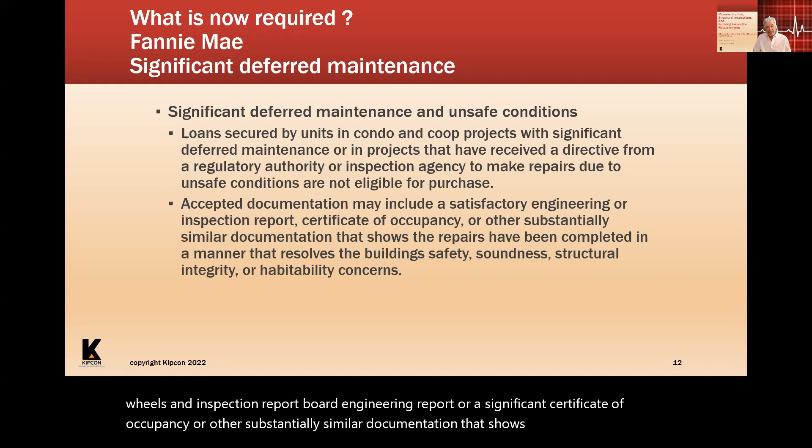Accepted documentation may include a satisfactory engineering or inspection report. To me, it's really not clear what the difference is between the person who does an inspection report versus an engineering report, or a certificate of occupancy, or other substantially similar documentation showing the repairs have been completed in a manner that resolves the building's safety, soundness, and structural integrity.

Now, I'm going to jump around a little, but you'll see that if there's a special assessment, even if you've had one to fix things, they will not approve a loan or make it eligible for purchase unless the special assessment work is completed. You can't do it if you just have a special assessment.

These policies do not apply to routine maintenance or repairs that a homeowner association undertakes to maintain or preserve the integrity and condition of the property.

Now, when I look at this, as you know, a lot of us live and breathe community associations. Keep in mind, this is for condos. There's a mix-up in terminology here because a lot of people interpret homeowners associations as something different from a condo, but this is based on condos and co-ops, so don't be confused by the wording.

The policy doesn't apply if the damage or deferred maintenance is isolated to one or a few units — I don't know exactly what 'a few units' means — and does not affect the overall safety, soundness, structural integrity, or habitability of the improvements.

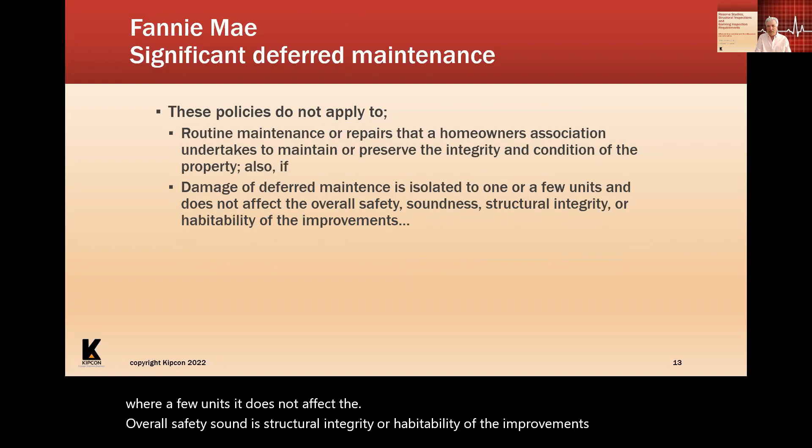So there are some things the policies do not relate to. Now let's talk about Fannie special assessments.

Any current or planned special assessment, even if paid in full for the subject unit, must be reviewed to determine its acceptability. What does that mean? If the special assessment is related to safety, soundness, structural integrity, or habitability, all related repairs must be fully completed or the project is not eligible. So there's a number of things going on here, and certain requirements apply.

Now, what did they say about reserves? It used to be that you needed to set aside in your reserve fund 10% of your annual budget, or have a reserve study done in the prior 24 to 36 months — I think it's 36 months for Freddie and 24 months for Fannie. But they've changed that, and now they don't allow a reserve study to justify less than 10% of the budget.

And they require that the community have a reserve study in lieu of, which is 10% of the budget. So if you've heard my seminars on reserves, it's 10% of the budget — not to give my opinion on this, but 10% of the budget may not necessarily be reflective of the community, but it's the guideline they're using, and that's what it has to be.

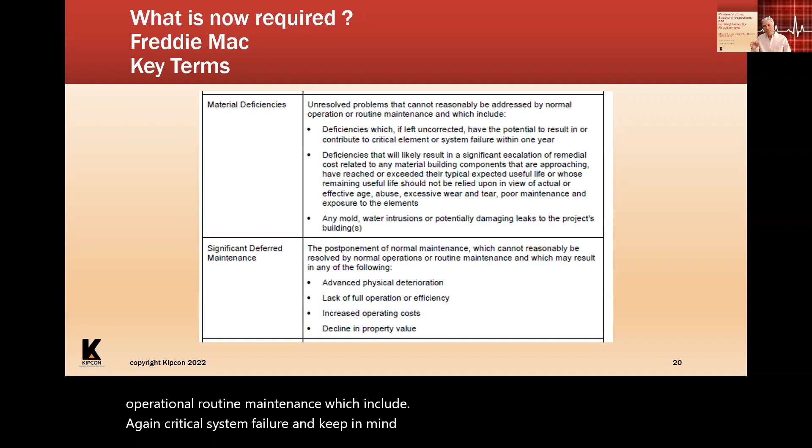Material deficiency means unresolved problems that cannot reasonably be addressed by normal operational routine maintenance, which include critical system failure. Keep in mind, which I'll get to in a few minutes, that in some cases we're not just talking about the structure - we may be talking about, for example, a fire protection sprinkler system, where if there's a fire and it doesn't work, it's a danger. So it's not just a matter of buildings collapsing.

So material deficiencies include deficiencies that will likely result in significant escalation of remedial costs related to material building components - I'll touch on that in the future - but also any mold. Now, they really draw the line and say significant deferred maintenance - what does that mean? The postponement of normal maintenance which cannot reasonably be resolved by normal operations or routine maintenance.

And which may result in any of the following. Now, there's some confusion in terms being used here regarding deferred maintenance and routine maintenance. I'm going to touch upon that in the future regarding what the industry and the standards say about the definitions of the different types of maintenance, but which may result in any of the following: advanced physical deterioration, lack of full operation, increased operating costs, or decline in property value. So these are the kind of definitions we're dealing with when it comes to these standards.

So now, what are routine repairs and maintenance? Often preventive, let me see, my pointer is not going where I want it to go. Okay, here we go. Routine repairs, often preventive, accomplished within the project's normal operating budget, typically completed by on-staff site staff, focused on keeping the project fully functional.

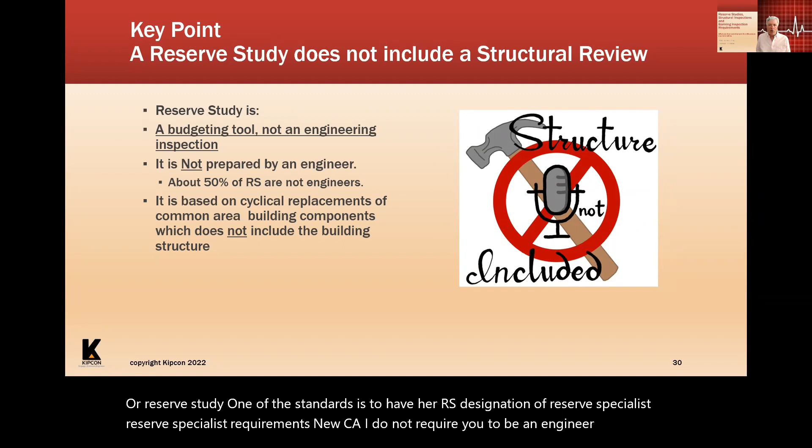To prepare a reserve study, one of the standards is to have an RS designation, a reserve specialist. Reserve specialist requirements through CAI do not require you to be an engineer, and less than 50% of those who have their RS are engineers. So please don't be fooled into thinking that if you do a reserve study and keep it up to date and adequately funded, it will protect the structure of your building. It doesn't. The reserve study is based on cyclical replacement of common area building components like roofs, roads, sidewalks, and those kinds of things. It does not look at the structure.

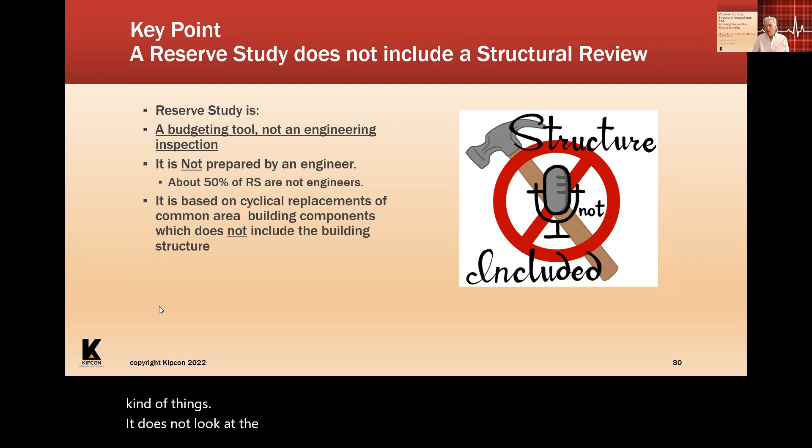The next thing we concluded pretty quickly is that this is not a high-rise problem. The building that collapsed was a high-rise, no question, but public policies should be based on the type of structure, not the height of the building. So these public policies are based on multi-family residential buildings of concrete, load-bearing masonry, steel, or hybrid structural systems, such as heavy timber, including podium decks, which I'll touch on. It's not just high-rises, it's based on the materials.

For all the managers out there, I'm sure you've seen buildings that are not high-rises that are starting to exhibit structural problems.

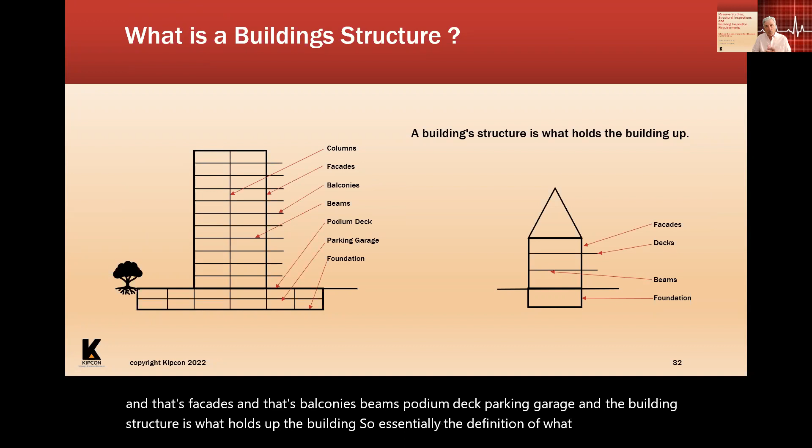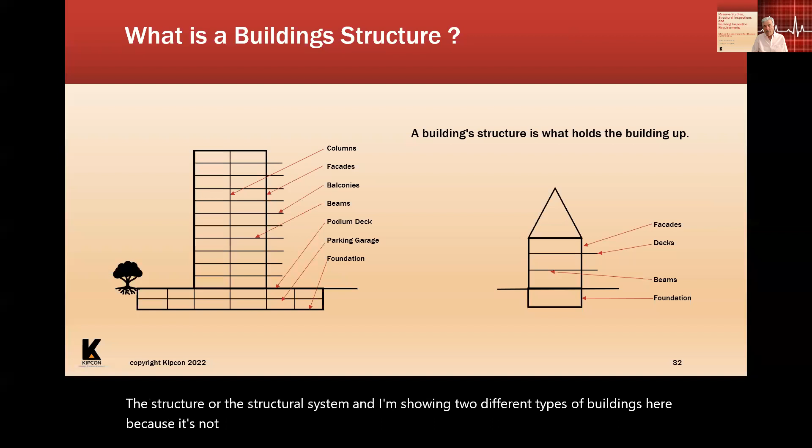So what is a building structure? A building structure is made up of certain parts: columns, facades, balconies, beams, podium deck, parking garage. The building structure is what holds up the building. So essentially, the definition of what you're looking at when you do a structural inspection is the parts of the building that hold it up, the structure or structural system. I'm showing two different types of buildings here because it's not only a high-rise; this may be a townhouse building on the right-hand side.

So what is the structure designed for? I'll go through this quickly, though I like to talk about it since I'm an engineer. The structure is designed for the weight of the building, the live load in the building—for example, us people in the building are the live load—the snow on the roof, and the wind blowing against it. So it's designed based on the building code for all these different things.

What is the structural system of the building? The structural system takes those loads—dead, live, snow, and wind—and takes them from hitting or being inside the building, bringing them down to the ground at the foundation. To use a technical term, it's the interconnected parts of the building, the beams and columns, interconnected to form a path by which the external and interior forces—dead load, live load, snow load, wind, seismic—are applied to the building and delivered to the ground. That's what the structural system is.

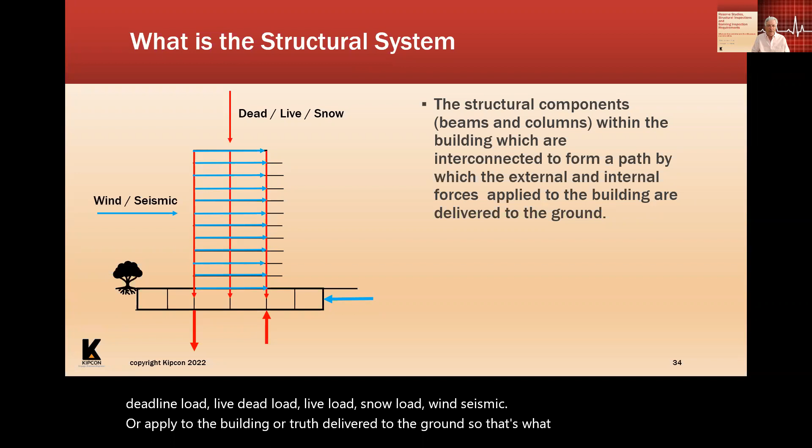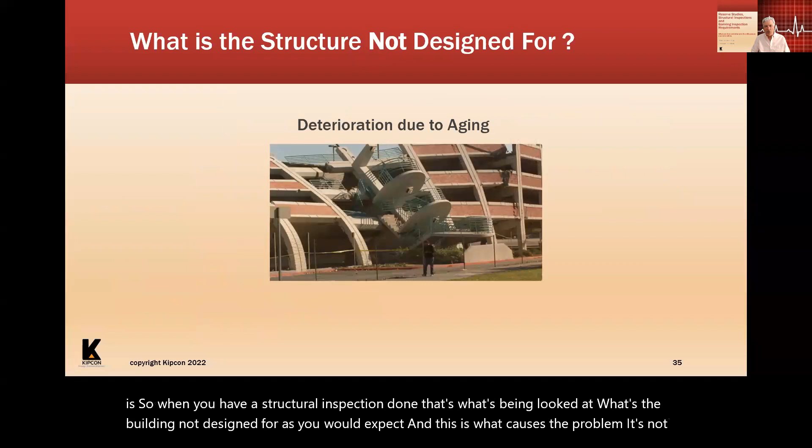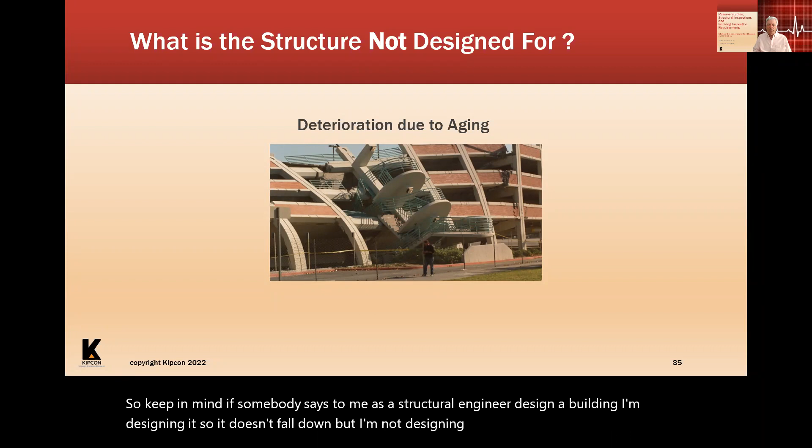So when you have a structural inspection done, that's what's being looked at. What's a building not designed for? As you would expect, this is what causes the problem - it's not designed for deterioration due to aging. If somebody says to me as a structural engineer, design a building, I'm designing it so it doesn't fall down, but I'm not designing it to keep it from aging, because everything ages.

There are certain structural materials, as I mentioned, that are used for the building, and I'm not going to go into that again. But what is the main cause of deterioration? Anybody want to guess? If you were here live audience, you'd all know it - the main cause of deterioration is moisture.

It's the age of the building, of course, but when you have moisture touching pretty much any type of structural system, it reduces the age. You can see I got wrinkles on my face because I stand out in the rain, my hair is turning gray because I stand in the rain. It takes the color out of it. But age and moisture - moisture is the primary thing that affects the structural capacity of the building.

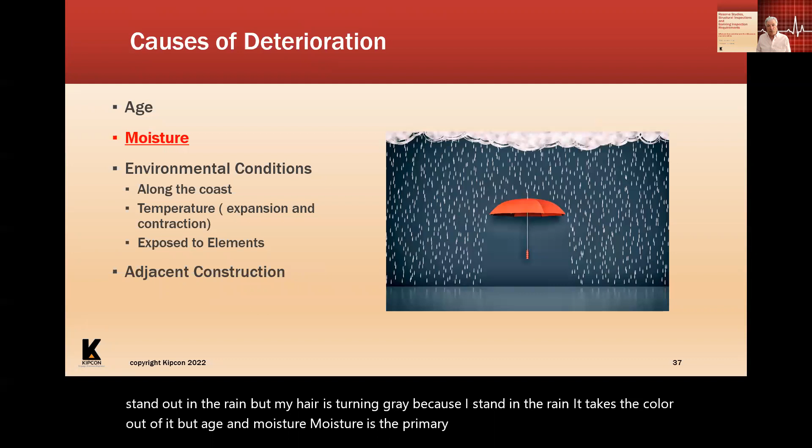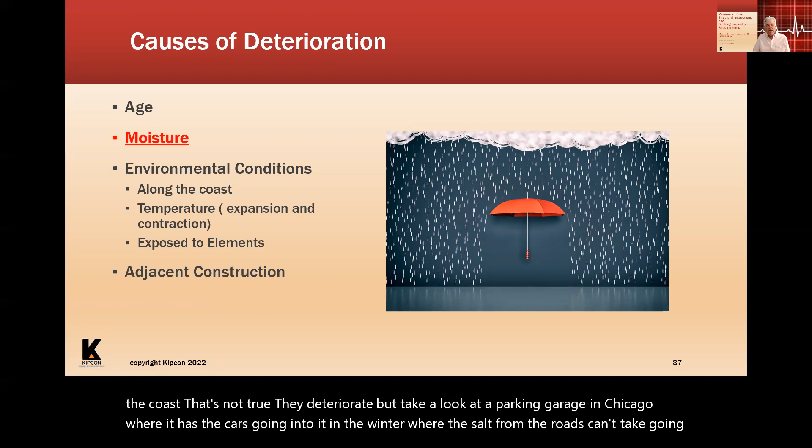Some people say, or you may hear people say, also environmental conditions - for example, it may happen faster along the coast, maybe because it's salt water, but it's based on moisture. Don't be fooled, because you've heard the comment that buildings deteriorate faster along the coast. That's not true. Take a look at a parking garage in Chicago, where it has cars going into it in the winter, with the salt from the roads going into the parking garage. That deteriorates just as fast as any building along the coast. So it's not a geographic problem, it's the conditions of what is touching the building.

It may be temperature, expansion and contraction, exposed to the elements, or adjacent construction. Let's say you're building a building next door and you have pile driving or something - it could have caused deterioration. But the primary cause of deterioration in our buildings is moisture.

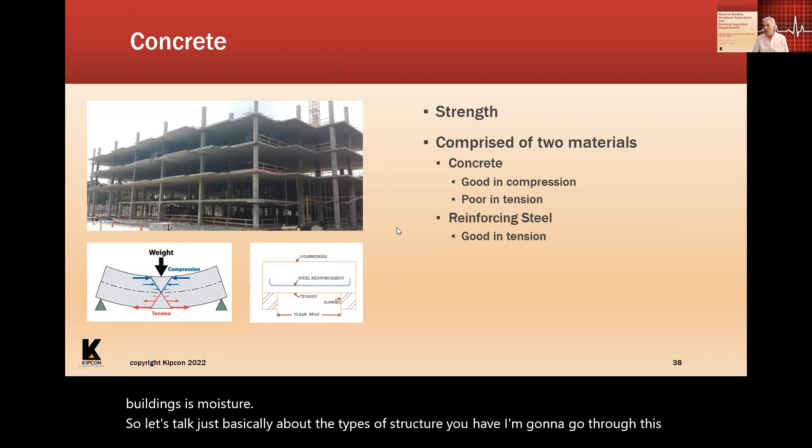So let's talk just basically about the types of structure you have, and I'm going to go through this relatively quickly. Concrete - it's made of concrete, which is good in compression and poor in tension. I'm not going to give a whole engineering class on this. If you want, call me. If you know me, you know I love to talk about this stuff. But it's good in compression, it's poor in tension.

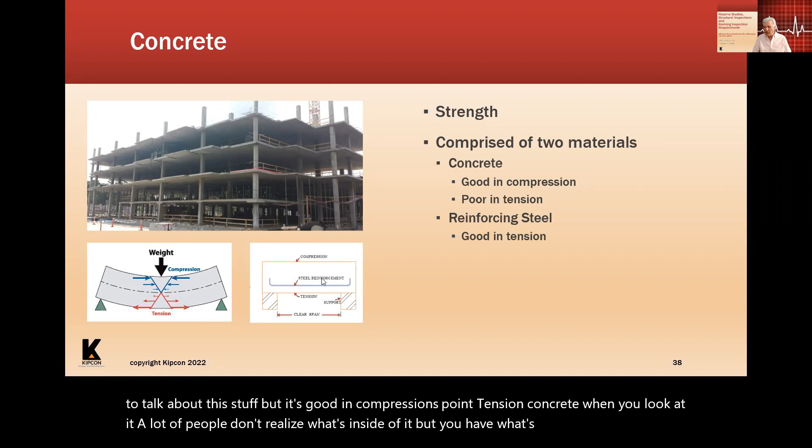Concrete, when you look at it, a lot of people don't realize what's inside of it, but you have what's called reinforcing steel. You see here on the bottom, steel reinforcing. That is steel that's put into the concrete, because the concrete is good in compression when you push, but it's not good in tension when you pull. But reinforcing steel is, and that's why you put reinforcing steel in concrete.

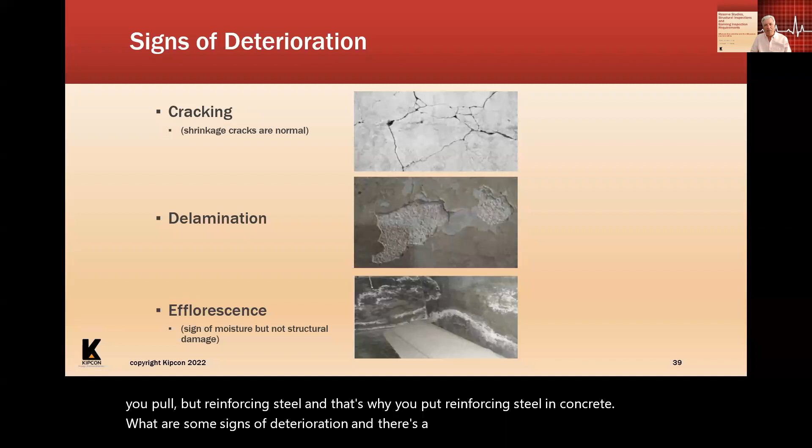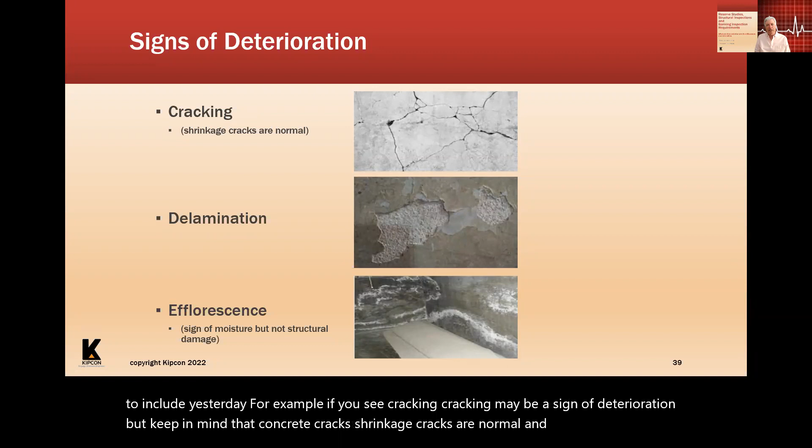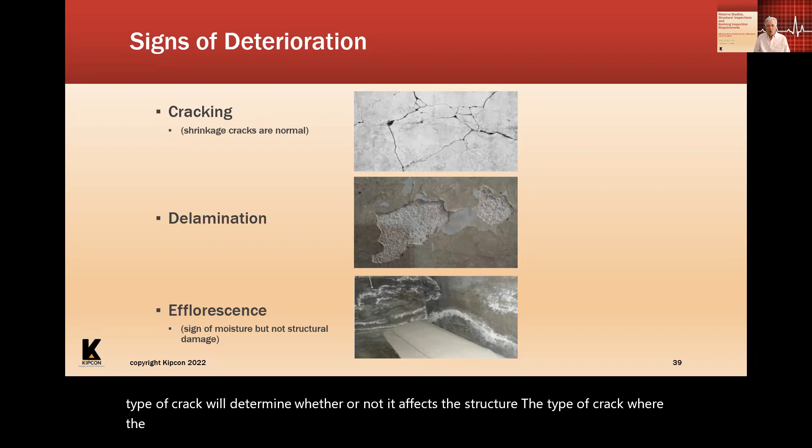What are some signs of deterioration? There's a couple of asterisks here that Bob asked me to include yesterday. For example, if you see cracking, cracking may be a sign of deterioration, but keep in mind that concrete cracks - shrinkage cracks are normal in concrete. So depending on the type of crack, that's why you need an engineer to look at it. Depending on the type of crack will determine whether or not it affects the structure - the type of crack, where the crack is. But cracking is one sign of deterioration. Again, keep in mind, shrinkage cracks are normal.

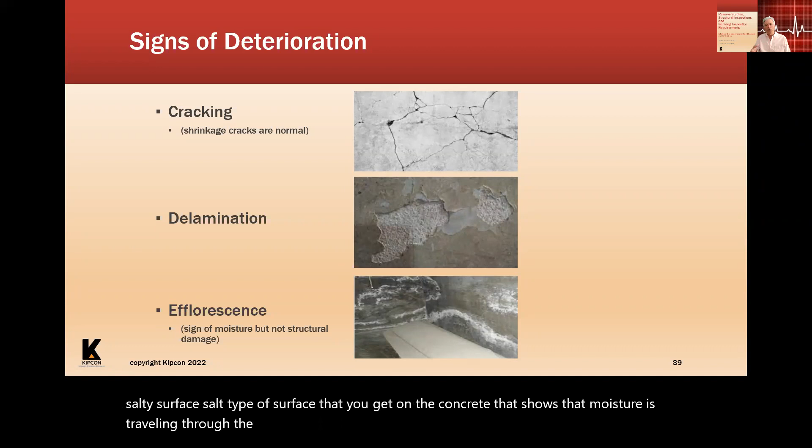Delamination, that's where the surface may peel off. Efflorescence is another one, where it's a salty surface, salt type of surface that you get on the concrete. That shows that moisture is traveling through the concrete and it's carrying with it the salts in the concrete. Just because you have efflorescence does not mean it affects the structure. It does not affect the structure, but it is a sign of moisture that causes deterioration.

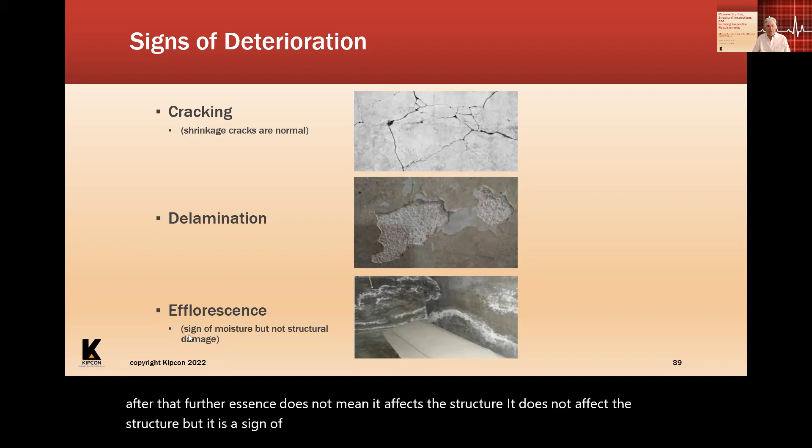Which you can see in the next slide, because what happens to the reinforcing steel inside of concrete when it gets wet? It rusts. When steel rusts, it expands. When it expands, it pops out the concrete. That's because the water is getting into the concrete, which the first sign may be the efflorescence, the second sign is rusting. The process is: before corrosion, it's a nice round piece of steel, buildup of corrosion, it expands, and then it pops out the concrete. One of the terms for popping out concrete is spalling.

The other thing Bob had asked me to add, which is absolutely correct - more and more buildings, and some buildings in the past, are using what's known as epoxy-coated reinforcing steel.

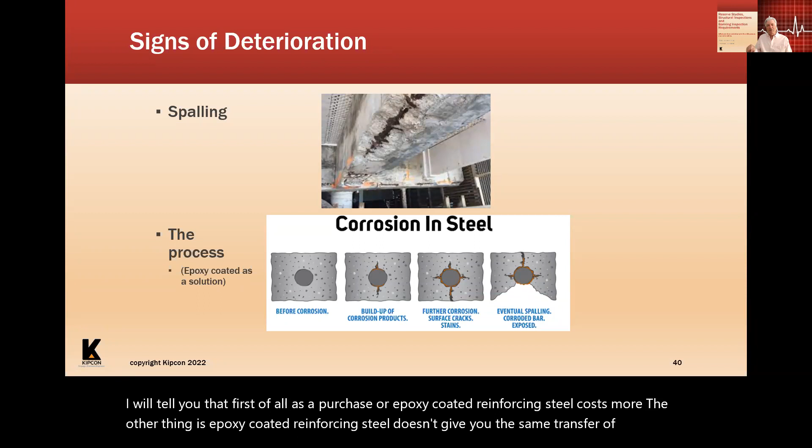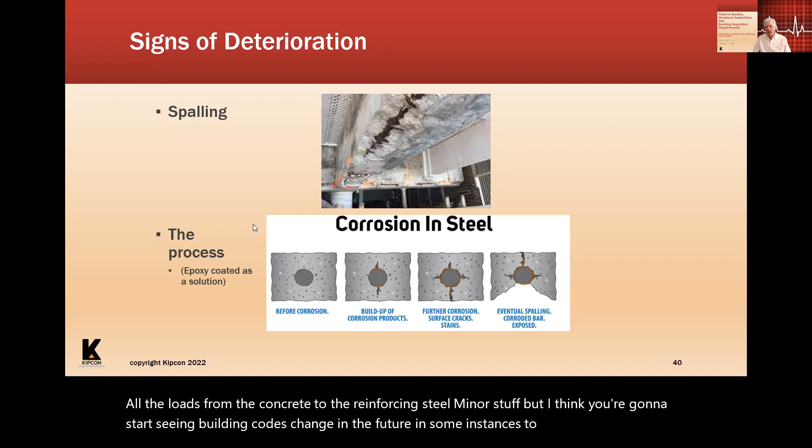It's steel that has an epoxy on it to keep water from it, which keeps it from rusting. As an engineer, I'll tell you that as a purchaser, epoxy-coated reinforcing steel costs more. It also doesn't give you the same transfer of loads from the concrete to the reinforcing steel. Minor stuff, but I think you'll start seeing building codes change in the future to require epoxy-coated steel in some instances, like in a parking garage, as opposed to using regular steel.

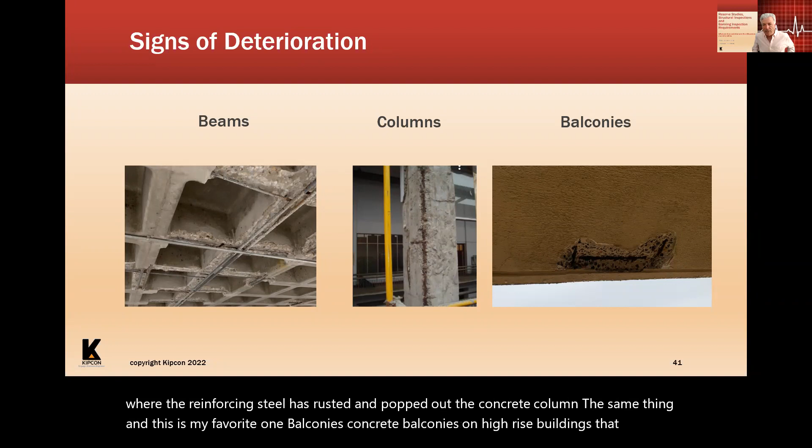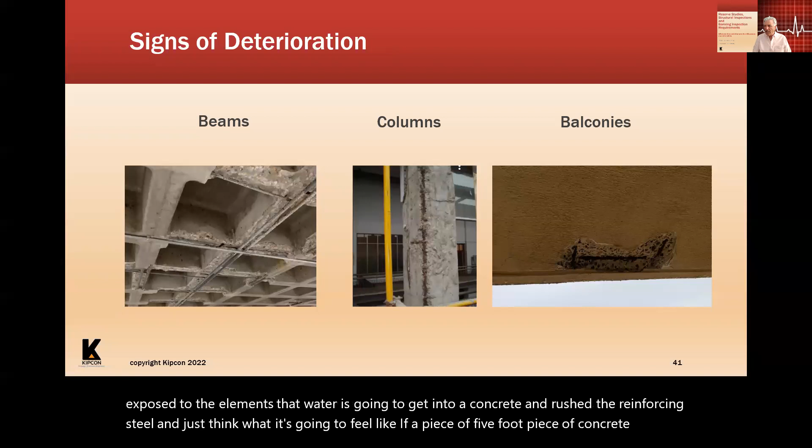What are some signs of deterioration? If you manage concrete buildings, you've probably seen this before. These are pictures of beams where the reinforcing steel has rusted and popped out the concrete. Same with columns. And my favorite, balconies, concrete balconies on high-rise buildings exposed to the elements. The water gets into the concrete and rusts the reinforcing steel. Think what it would feel like if a 5-foot piece of concrete pops out and falls 10 floors. So balconies are not only a structural issue but a safety issue, no question, even for minor sections. Those are some signs of deterioration for concrete.

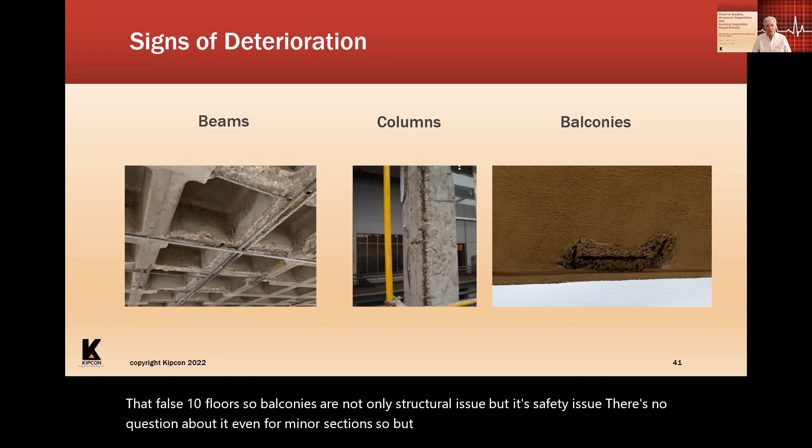Now let's talk about steel. Steel has the same strength in all directions. It's not like concrete, which is good in compression but not good in tension.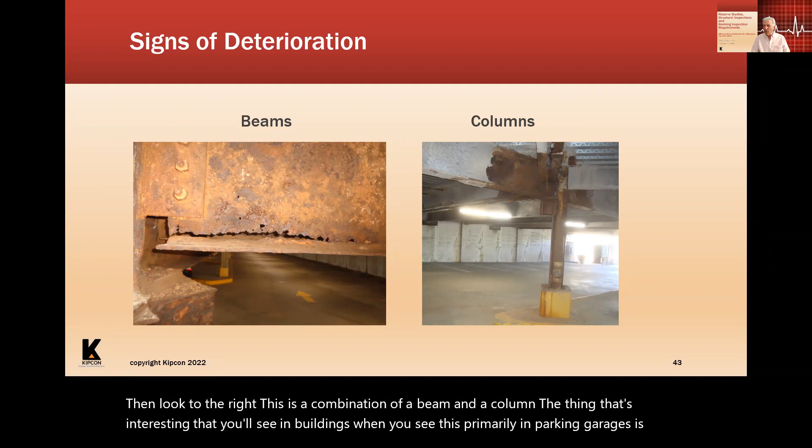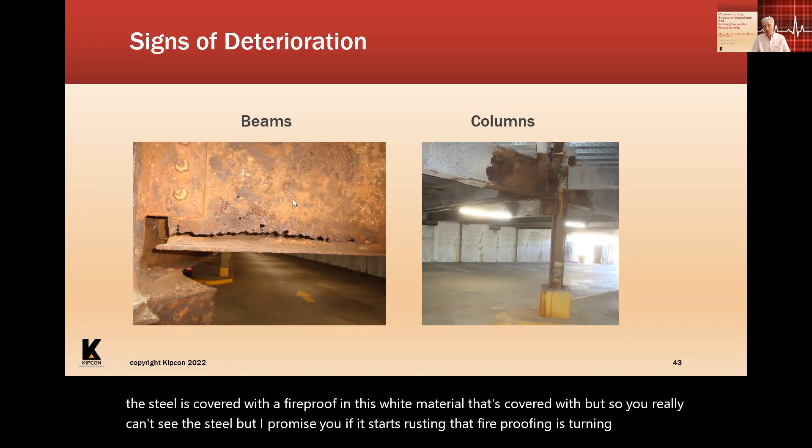What does steel look like when it rusts? These pictures are from actual buildings, I see this stuff every day, guys in my office see it every day. Look at this beam on the left, it's rusting and the structure of the beam is totally gone. Then look to the right, a combination of a beam and column. What's interesting, you'll see this primarily in parking garages, is that steel is covered with fireproofing, this white material, so you can't really see the steel. But I promise you, if it starts rusting, that fireproofing turns brown and you'll understand something's going on. Keep in mind, if you're seeing the rusting, the water's been there a while. It doesn't happen overnight.

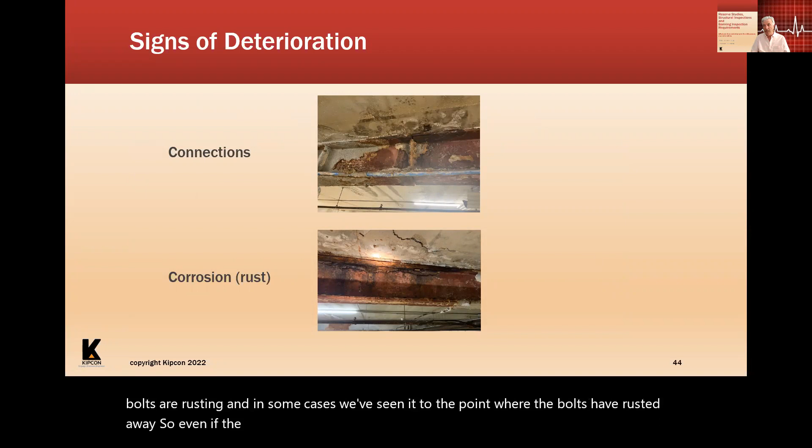Deterioration of connections: steel is connected together with bolts. The top picture is something we saw in the last few months where the steel is rusting and the bolts are rusting. In some cases, we've seen the bolts rust away entirely. So even if the structural steel member is okay, if the bolts aren't adequate, that connection can come apart and it can collapse. Again, these are things you can see. The bottom picture shows another corroded beam based on rust.

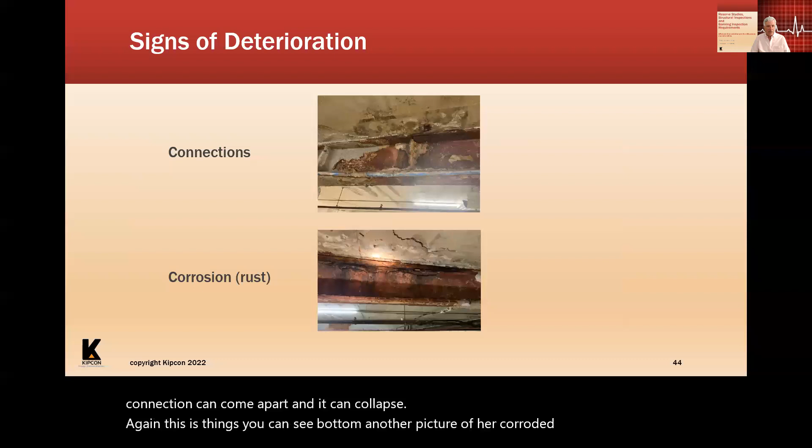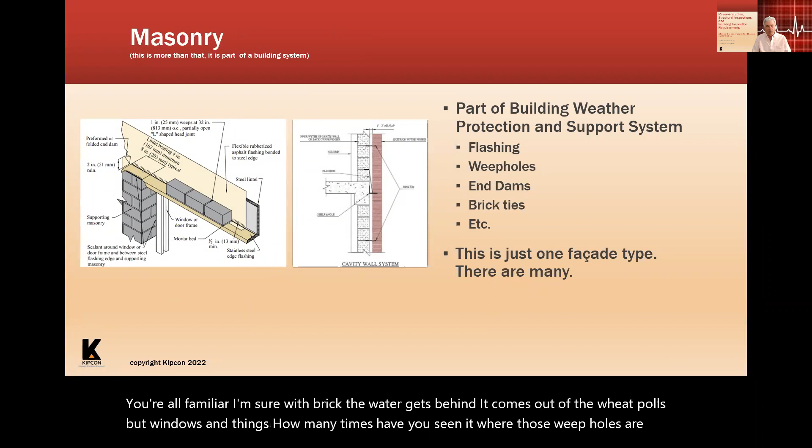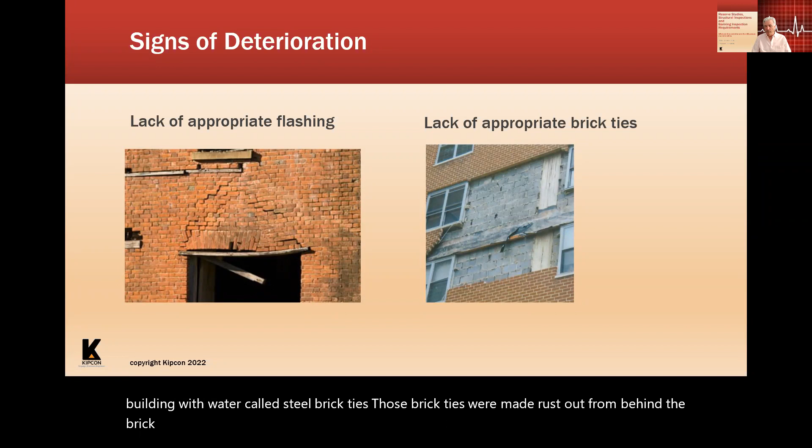Now let's move on to another type of material, masonry. Masonry is part of a building's weather protection. You're all familiar with brick. Water gets behind it and comes out of the weep holes above windows and things. How many times have you seen weep holes blocked or flashing not put in right, and then the water gets trapped inside the brick? On the left, you see water trapped behind the brick because it can't get out. It rusts the steel lintel above a door, and the lintel starts to deflect because it's losing strength. Look what happens to the brick above it. The right picture shows brick attached to the building with steel brick ties. Those ties may rust out from behind the brick, or there may not be enough of them. Then what happens? The brick falls off.

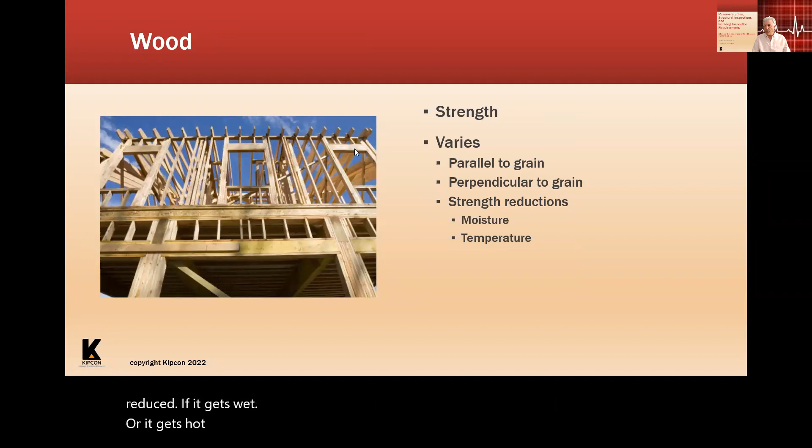Now let's go through this quickly. Let's talk about wood. Wood is an interesting material. I really like wood as a structural engineer because it has different strengths based on different things: strength parallel to the grain, perpendicular to the grain, and the strength is reduced if it gets wet or hot. But this is what wood looks like and that's what the strength is. You all know what wood looks like when it starts getting water on it, it rots away. Pretty easy to see, but in a lot of cases, how many times do you have buildings where the wood is covered and you can't see it?

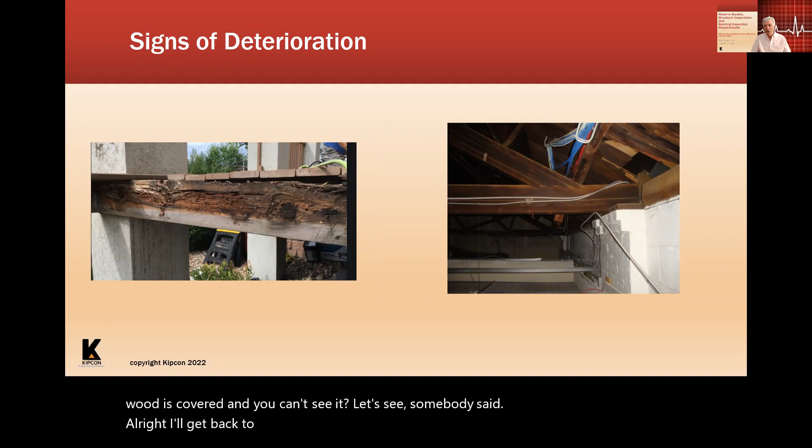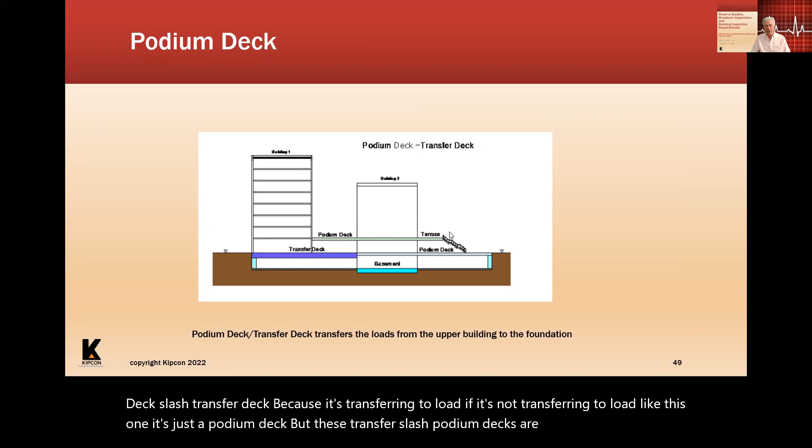These transfer and podium decks are used a lot in buildings. How many of you have buildings with a deck over a parking garage, or something else exposed to the outside and to weather? So what happens with a podium deck, and why is it so critical?

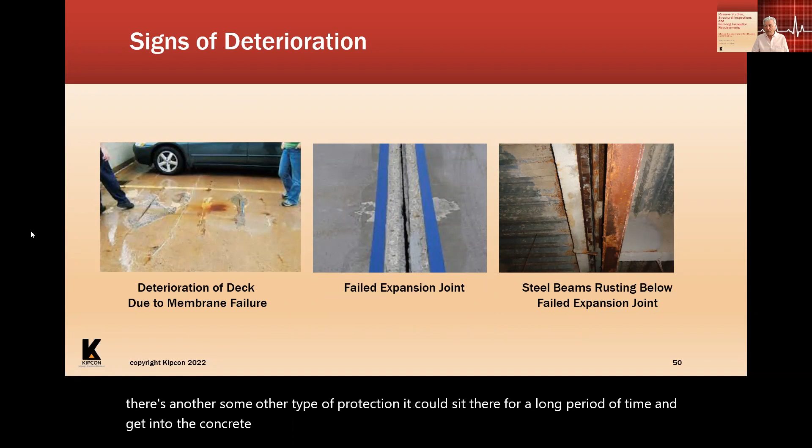Going left to right, here's what the deck looks like. Most concrete decks in a parking garage have a membrane on them, because cars coming into the garage carry water and salt that sits on the concrete. If there isn't a membrane or other protection, it can sit there a long time and get into the concrete, rusting out the reinforcing steel, which is what you see in this picture. You see the rust, you see the reinforcing steel. This is deterioration of the deck due to membrane failure. Keep in mind, the membrane of your parking garage should be in your reserve study.

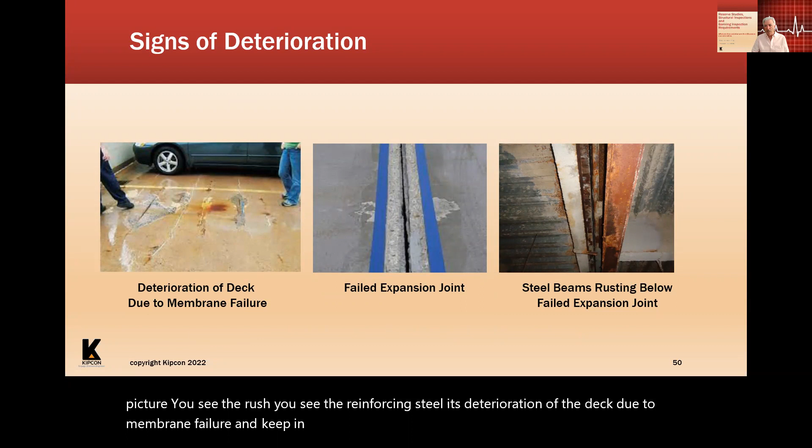In the middle, a failed expansion joint. Why do you have an expansion joint? Because concrete in a building expands and contracts, and depending on its size, this determines how much, so they put in expansion joints. How many times have you walked through a parking garage and seen this, where the expansion joint location is there but the actual material of the joint is gone?

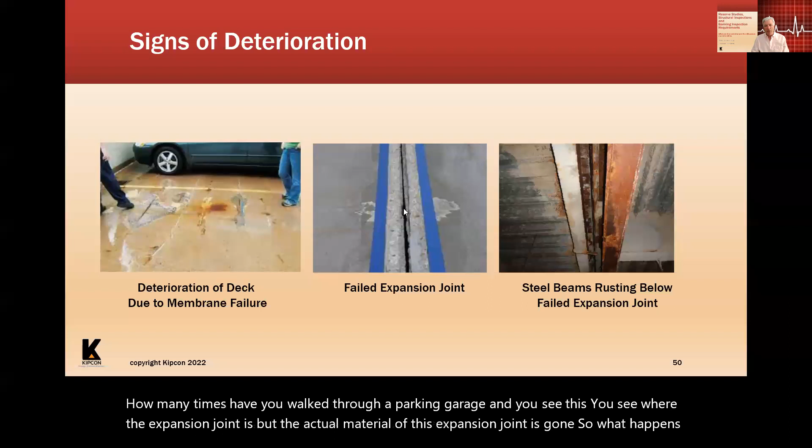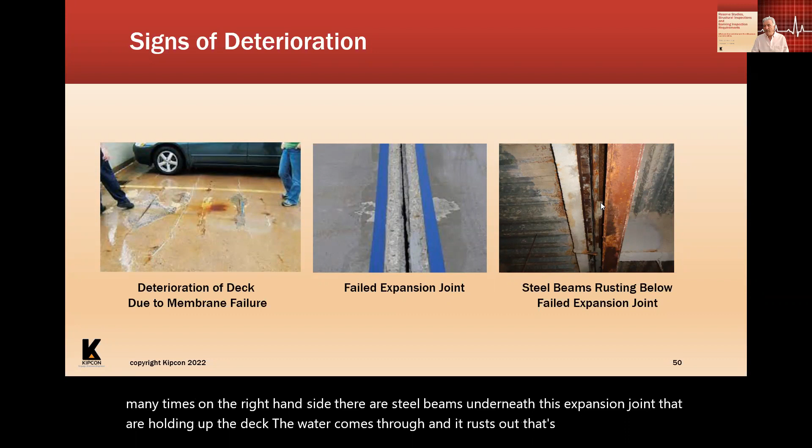So what happens? Water gets through, but you don't realize what's going on underneath it. I've seen this so many times. On the right-hand side, there are steel beams underneath this expansion joint holding up the deck. The water comes through and rusts out that structural steel. It's a very common problem. If you see a failed expansion joint and water's getting through, fix it or replace it - it'll cost you a lot less than having to replace these structural beams. And I know, because I've been involved in a lot of them.

All right, now, making the building safe during construction. There are public policies that CAI is recommending, and more states are coming out with policies like this. I see everybody's still here, so I'm going to go past 10:30 - there's a lot of information. If you have to leave in a few minutes, you'll get a copy of this. But let's talk about public policy requirements at turnover.

Keep in mind, the inspections I'm going to talk about to make sure buildings are safe are not in place for a transition study - they're not meant to be in place for that. But at turnover, a complete set of architectural and engineering drawings used for construction, to obtain the building permits, should be provided. If there were changes to the structure, an engineer must confirm those changes still provide structural adequacy. I'm going to talk in a second about the importance of design drawings.

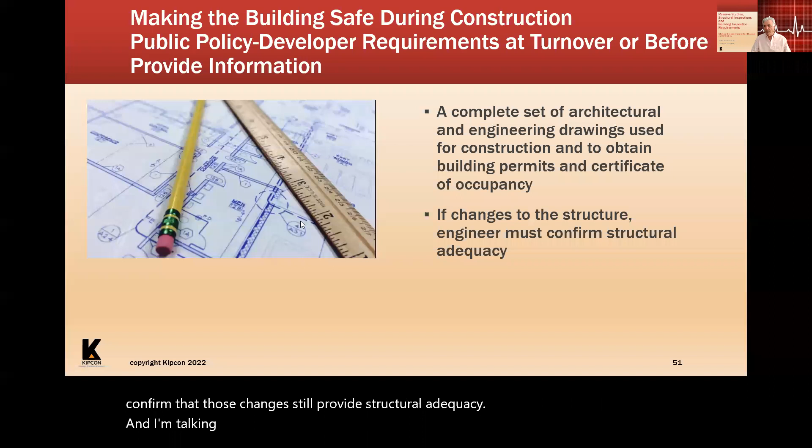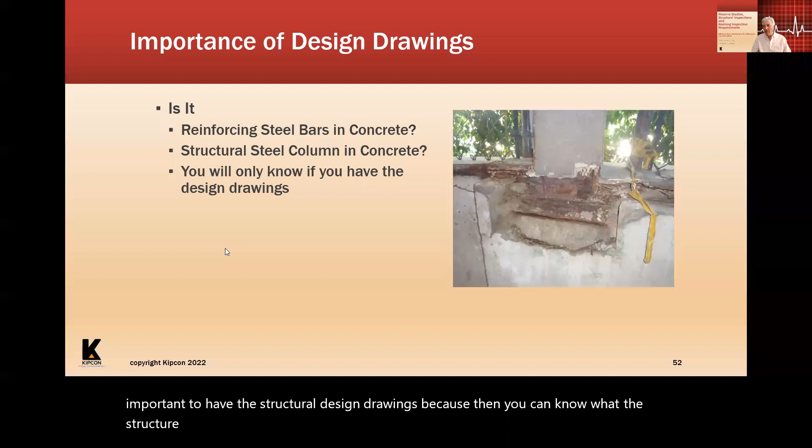The next thing is, when a builder turns over a community to you, the public policy generally now says they must provide a reserve study.

But now it's going to say to also provide a preventive maintenance manual for the common elements. It should include a maintenance schedule and estimated cost and timing for the maintenance. The public policy also recommends that the reserve study or preventive maintenance schedule include the cost of future periodic inspections and reserve studies to make sure it's done, because generally these costs are not a line item in your budget, like attorney's fees or manager's fees or accounting fees are. Where do you have a line item for most communities for engineering fees for inspection?

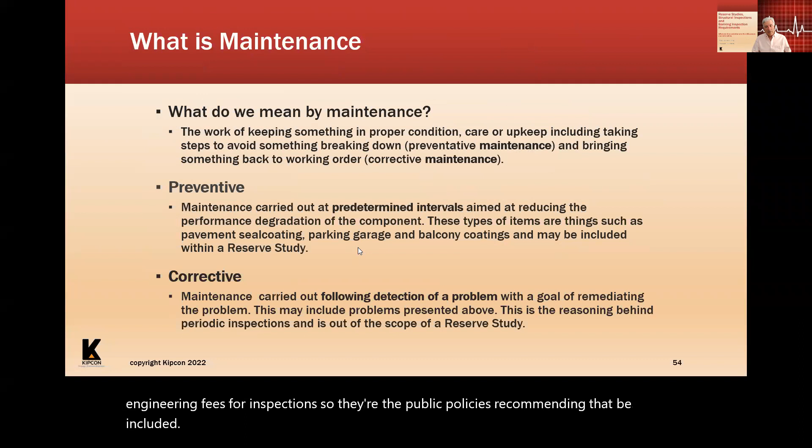So the public policy is recommending that that be included. Now, we talk a lot about maintenance, and there's a lot of different definitions used in terms of maintenance that people use incorrectly. If you look at the standards for maintenance, I'm just going to present two of them because they're the ones that relate to us: there's preventive maintenance.

Preventive maintenance is something that you can plan ahead. If you have things on your reserve study that are going to have, for example, a useful life of 20 years, you want to do preventive maintenance to those components to make sure they get to 20 years. That's preventive maintenance. You're preventing things from happening.

But now there's the other term, corrective maintenance. Corrective maintenance is something you cannot plan for. As a building ages, all buildings age differently. But when you go into an inspection and you see problems, you have to do corrective maintenance to correct them, but it's something you can't plan for. It's following detection of a problem.

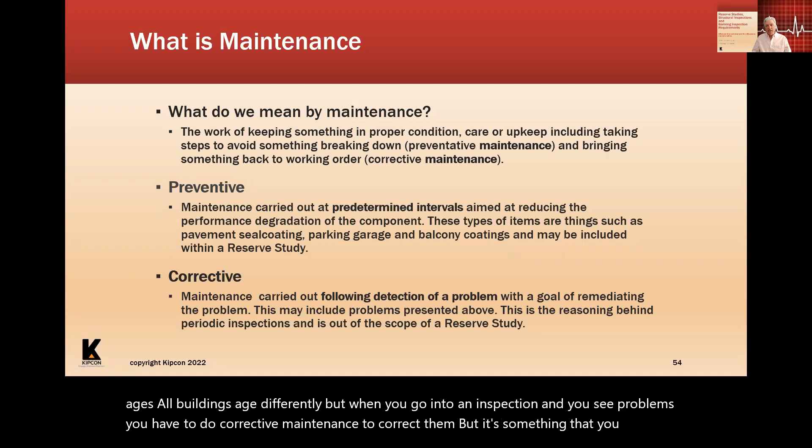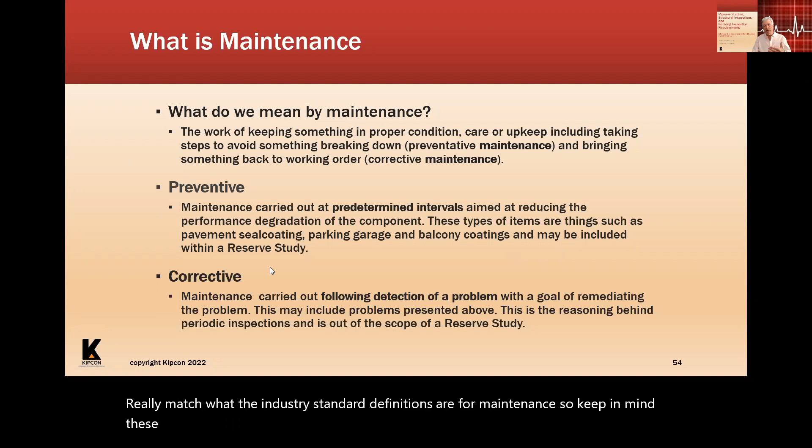So when you go back to the definition of maintenance that was used an hour ago or so, it's different, and it doesn't really match what the industry standard definitions are for maintenance. So keep in mind, these are the two critical types of maintenance: preventive and corrective. Preventive you can plan for, corrective you cannot.

What about maintenance and the life cycle? You hear about life cycle costs. This is very, very important to understand. Do not put off doing maintenance. Experts estimate that between 2 and 6% of your annual operating budget should be spent on preventive maintenance in order to effectively minimize a facility's rate of decay, which can result in corrective maintenance later on when you do the inspections.

Very important: the failure to maintain will cost on average 30 times more than the cost of preventive maintenance. So if you're spending 2 to 6% of your operating budget on preventive maintenance, if you don't do it, it's going to cost you 30 times more the cumulative cost of preventive maintenance to fix something. People really need to understand life cycle costs, not just cost, because how many people say, we're not going to pay for maintenance, we'll just fix it when we need to? Here's the difference and why you should do it: life cycle costs.

The public policy requires inspections during construction. There's different types of inspection that should be done. Obviously, if you're looking at a steel building, it's very easy to look at the steel, see if it's the right size, see if the bolts are correct based on the drawings. But if you're doing a concrete building, once the concrete is in, you can't see the reinforcing steel anymore. So more frequent inspections are required to make sure it's being built in conformance with the design drawing.

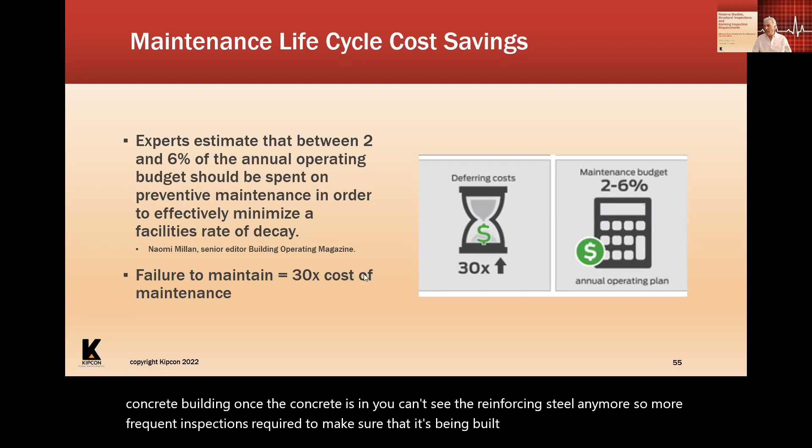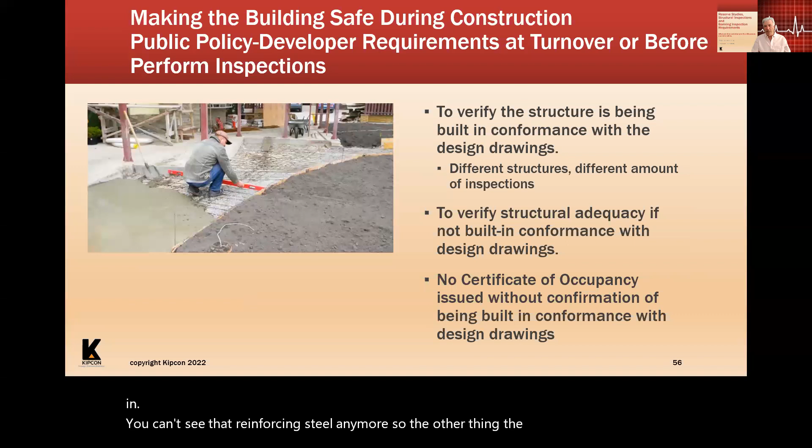So here, this is an example of exactly what I said. Once this concrete is put in, you can't see that reinforcing steel anymore. So the other thing the public policy recommends is that no certificate of occupancy issue without confirmation of being built in conformance with the design drawings.

All right, what's the process for looking at your buildings? The basic process includes a preliminary assessment and a detailed assessment to see the conditions. Keep in mind, if you know there's problems already, you can skip the preliminary assessment and go right to the detailed assessment. But the preliminary assessment essentially tells you whether or not you go into more detail based on the conditions. So how often do you do this?

5 years, 10 years? All over the world, it's different. All over the world, it's too long. For example, in Florida, where the collapse took place, I don't think you had to inspect that building until it was 40 years old. In Madrid, Spain, believe it or not, they have structural requirements for inspecting their buildings, but not until it's 50 years old.

Most other places around the world have public policy recommendations based on that. The first inspection for new construction is recommended no later than 5 years after construction or occupancy. For existing buildings more than 10 years old, the starting point is within 10 years. I'm talking about the first inspection.

The reason the first inspection is important is because it's set up as a baseline inspection. I always compare this to people who go to the skin doctor once a year. They take a picture of things on your skin, then you go back the next year and they say, has it gotten worse, has it stayed the same? That's the same kind of idea as a baseline inspection. The first inspection goes through a building, documents the conditions, so that in future inspections you can refer back to that report and see if things have gotten worse or stayed the same.

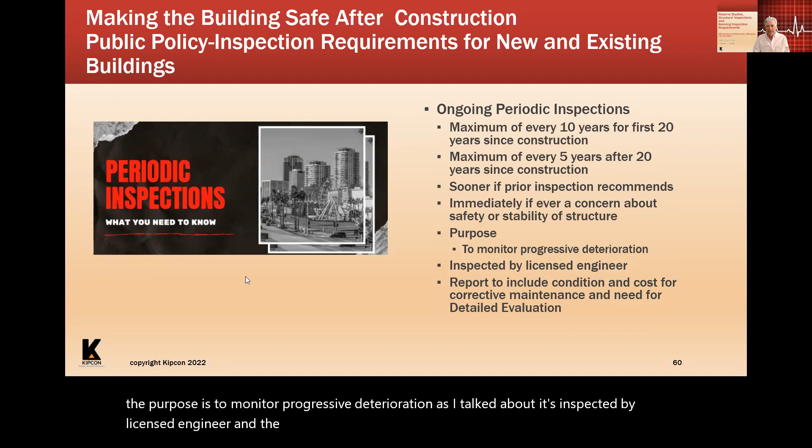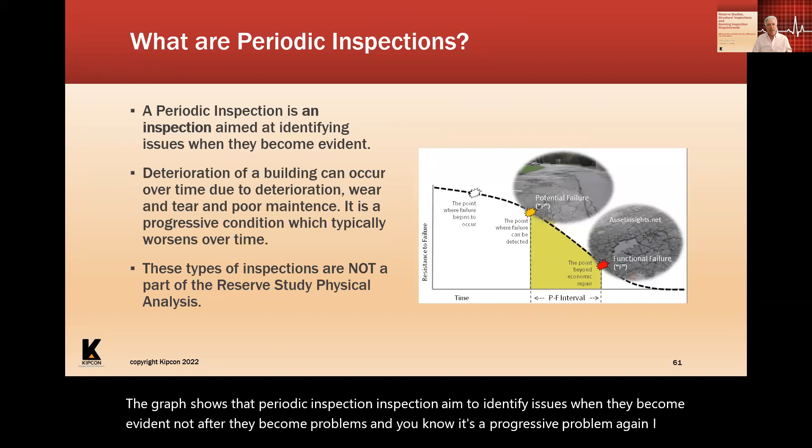Again, these inspections are not part of the reserve study — don't think they are, because they are not. The preliminary analysis looks overall at the entire structure of the building and the conditions, to see if there's something indicating a more detailed inspection should be done. For example, if you start seeing rust stains on a certain column, you'll recommend a detailed inspection be done where you see evidence of structural damage.

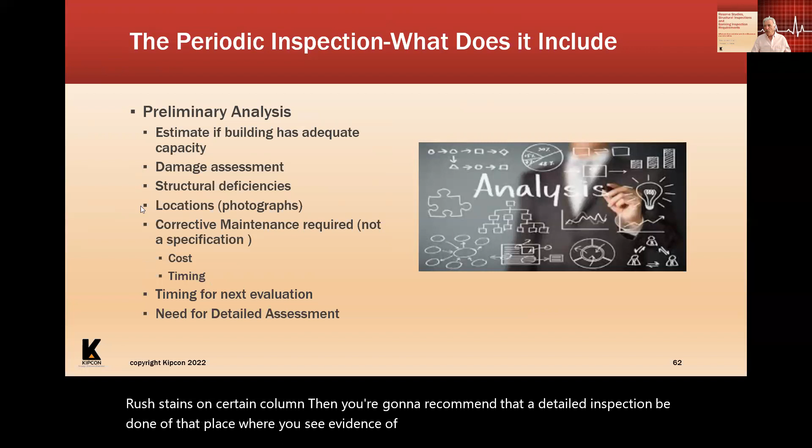So there's the periodic preliminary analysis and the detailed analysis, which looks more closely at specific locations in the building. Also keep in mind that one problem has been that to fix something, the board may have to ask the membership, based on the governing documents, for a special assessment or to borrow money — and it may be voted down.

This public policy says that the governing board of the association must have the power to impose a special assessment or borrow funds to make immediate repairs without a vote of the membership. This is, to me, one of the huge keys in the public policy.

Also, if there's a safety concern identified, the inspector must notify the local governing authorities. I'm going through this pretty quick because we're over time, but I see we still have pretty much all the audience. It's not just structure - there's a fire protection system, emergency generator, emergency lighting. Those are also safety issues.

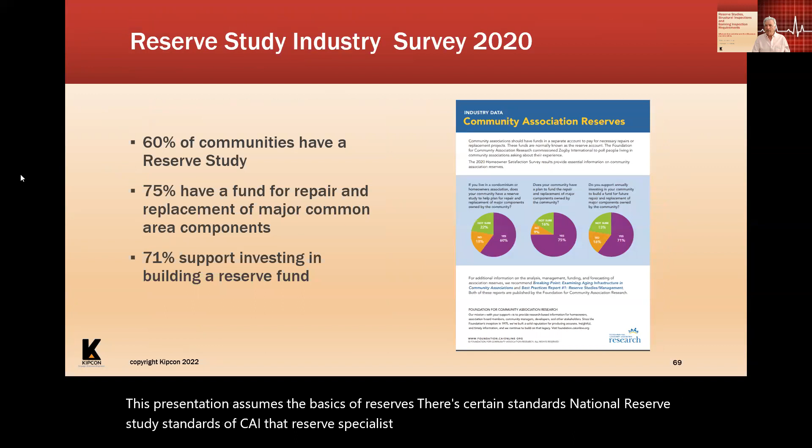Now let's talk a little about public policy on reserves and reserve funding policy. This presentation assumes you know the basics of reserves. There are certain standards, National Reserve Study Standards of CAI, the reserve specialist designation. CAI has done some research and found that 60% of communities have a reserve study, 75% have a fund for repair, and 71% support investing in building a reserve fund.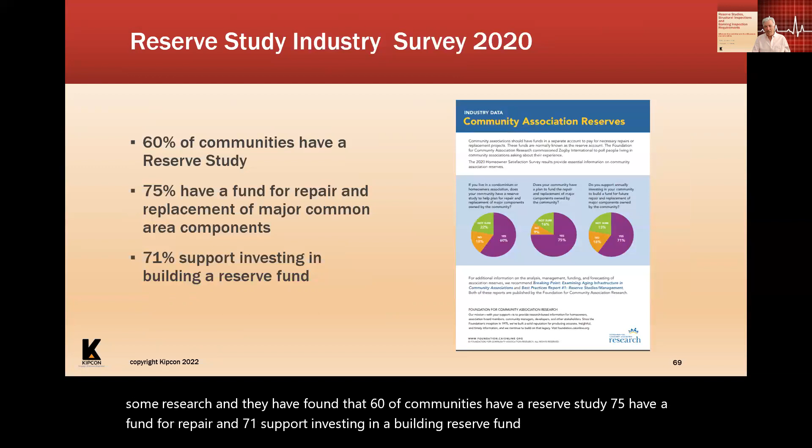One of the things you're going to see is more and more states - and if those of you are from New Jersey, it's happening in New Jersey - there are going to be statutory requirements for communities to have reserve studies and to fund them.

What is not included in the reserve study? This is kind of critical. There's actually a 3-day seminar CAI is putting on next week in Philadelphia nationally for managers on high-rise buildings, and it's going to talk in detail about the aging infrastructure report, because reserve studies are done differently for different types of buildings because of the things you can't see sometimes. This is also a free publication CAI has, the aging infrastructure report.

But what does the public policy say? It requires that reserve studies be prepared in conformance with the National Reserve Study Standards of CAI. It requires what's known as a preliminary study be done pre or during construction, which means that the budget for a community before it's built should have a study done based on the design drawings, even though it's not built yet. It requires that the study be updated at the completion of construction to match what was actually built. And I know this doesn't come as a surprise to you, but it's very rare, if ever, that what's actually built matches exactly what the drawings show. That's not to say it's a defect - it's just hard to build exactly the way the drawing shows.

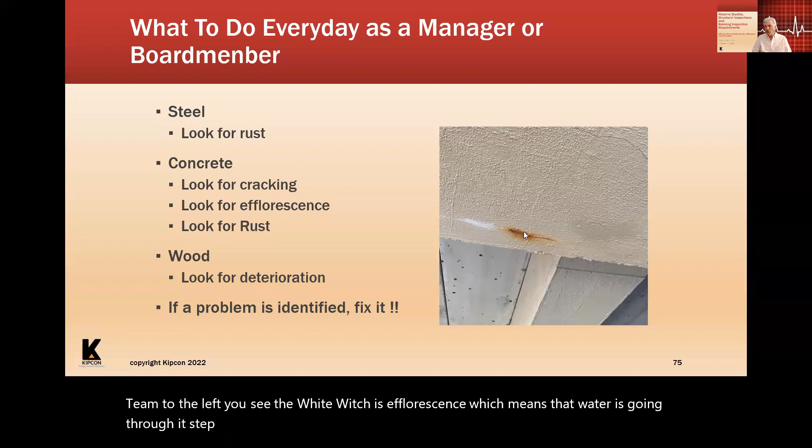I love this picture that I've got here, and I took this picture because it shows a concrete beam. To the left, you see the white, which is efflorescence, which means water is going through it. Step one. To the right, it shows rusting, and that's because the water's coming through it. Next step is rusting, and it's a great example to show that efflorescence is a sign of problems.

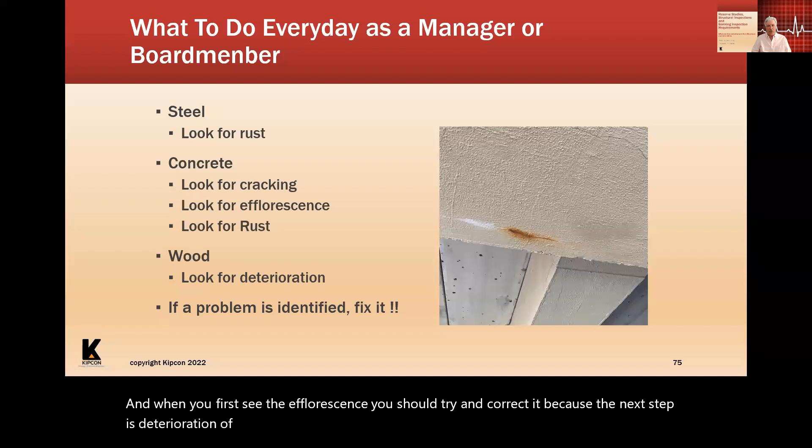When you first see the efflorescence, you should try and correct it, because the next step is deterioration of the reinforcing, which is ultimately going to crack out the concrete.

What as a board member do you not want to do? Don't ever do this. How many times have you walked into a parking garage where somebody's put a blue tarp in the ceiling because water's coming through and they don't want it to drip on a car, but they don't care if it rusts away the structure underneath it? If water's coming through, fix it. That's all there is to it.

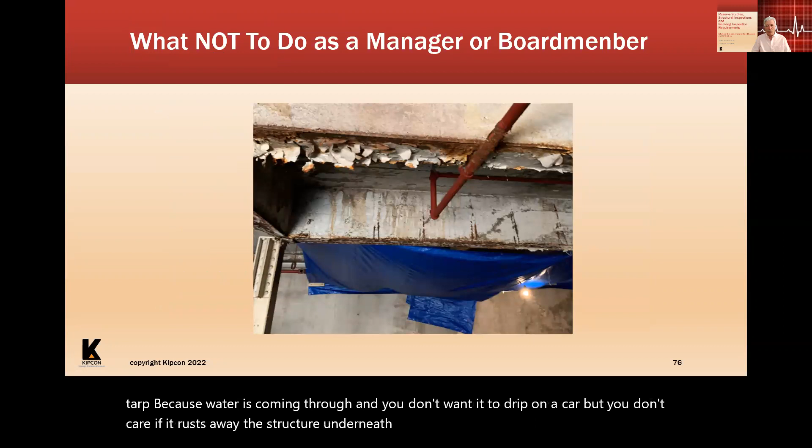I now touch a little bit on the differences between the banking inspection report, the structural inspection report, and the reserve study. One reason I put this in here is because as a community, you don't have to do these individually. Speaking as an engineer and a businessman, if you're having a reserve study done and you have certain qualifications, there's no reason why at the same time you can't do the banking inspection report or the structural inspection report.

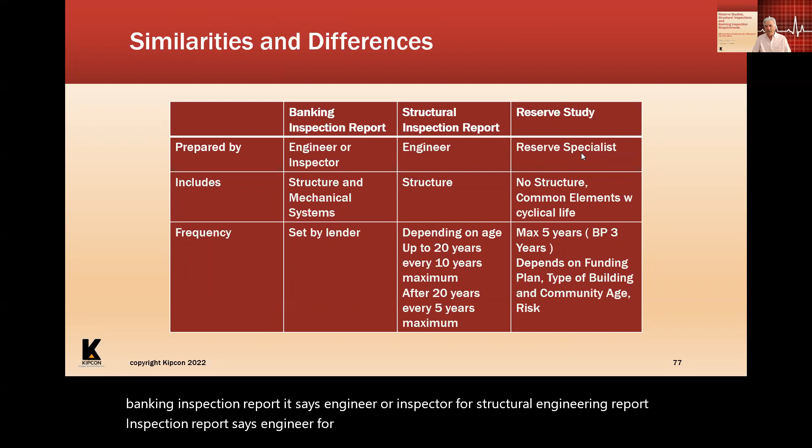So who's it prepared by? For a banking inspection report, it says engineer or inspector. For a structural engineering inspection report, it says engineer. For a reserve study, it says reserve specialist. So if you have somebody doing a reserve study who's also an engineer, there's no reason why they can't also do your banking inspection report and your structural inspection report.

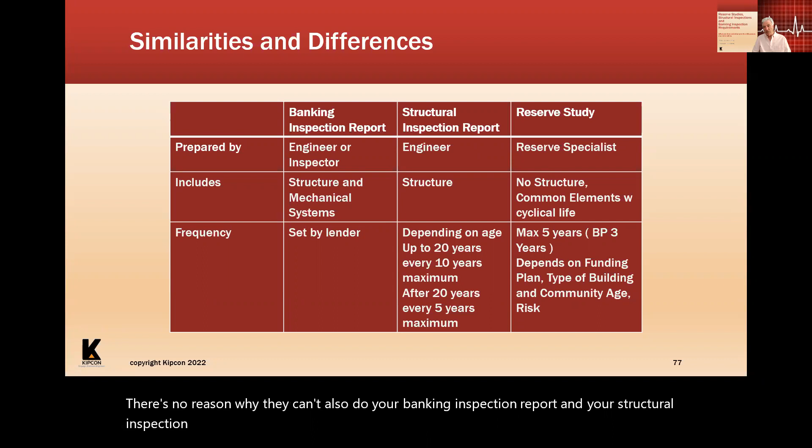But what are the differences other than the qualifications of the people who do it? The banking inspection report includes structural and mechanical systems. The structural inspection report only includes the structure, and the reserve study does not include the structure, but it includes the common elements with cyclical lives, which I talked about before.

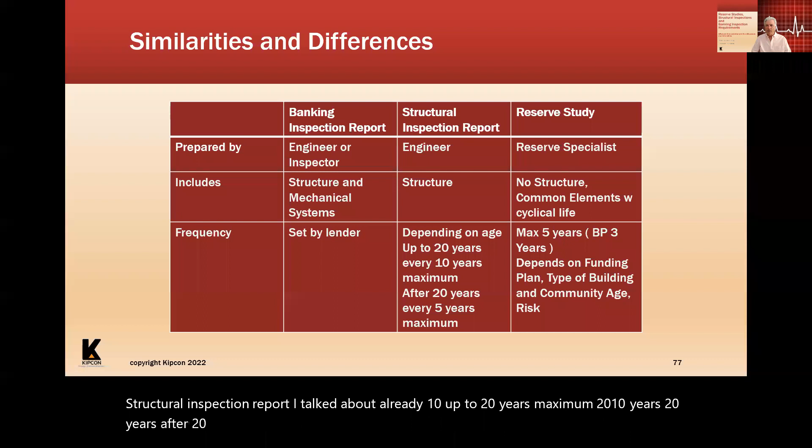In regards to frequency, the frequency for the banking inspection report is going to be set by the lender. They're going to tell you whether or not you need a report to verify that the conditions are okay. Structural inspection report, I talked about already - 10 up to 20 years maximum, then after 20 years, maximum 5 years. Reserve study, I also talked about that.

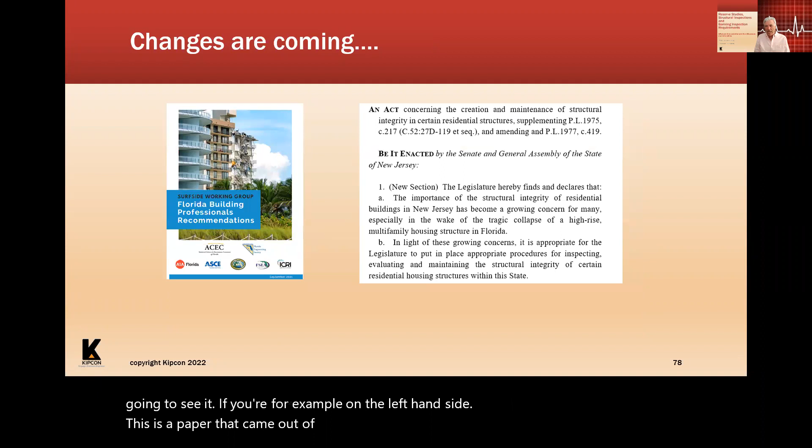Now I just want to mention that there are changes coming. There's no question about it, we're all going to see it. On the left-hand side, this is a paper that came out of Florida based on the collapse - Florida building professionals' recommendations on what to do next.

I think a lot of people in this presentation are from New Jersey. I'm on the New Jersey CAI Legislative Action Committee, and we've been working with the Senate, Senator Singleton in New Jersey. There's an act out there that's being looked at in New Jersey. It hasn't really gotten that far yet because it's real-time stuff.

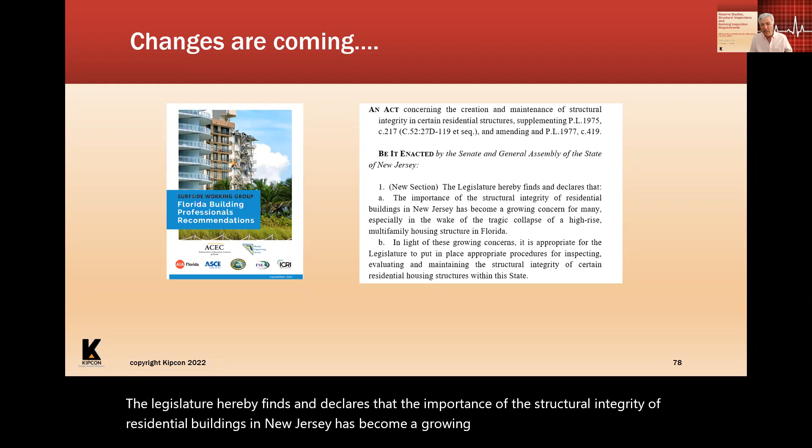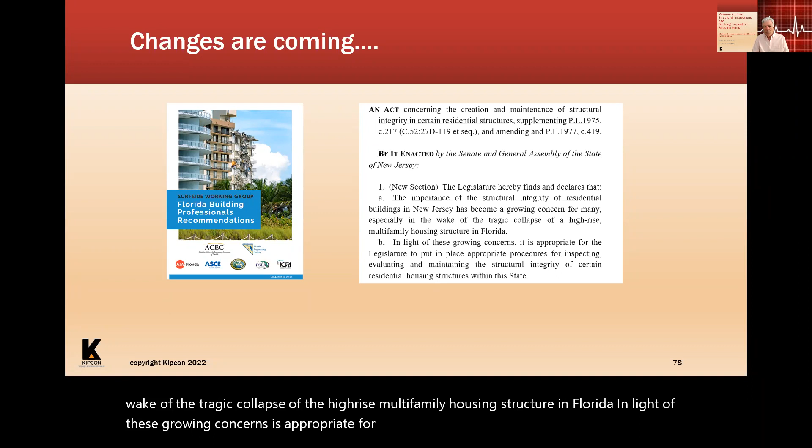Here's what it says: Be it enacted by the Senate and General Assembly of the State of New Jersey, the legislature hereby finds and declares that the importance of the structural integrity of residential buildings in New Jersey has become a growing concern for many, especially in the wake of the tragic collapse of the high-rise multifamily housing structure in Florida. In light of these growing concerns, it is appropriate for the legislature to put in place appropriate procedures for inspecting, evaluating, and maintaining the structural integrity of certain residential housing structures within this state.

It's on the way in New Jersey as well as other places. I will tell you, we've had a very close relationship in the state of New Jersey with the people putting together this bill, and it pretty much mimics what the CAI proposed public policy is.

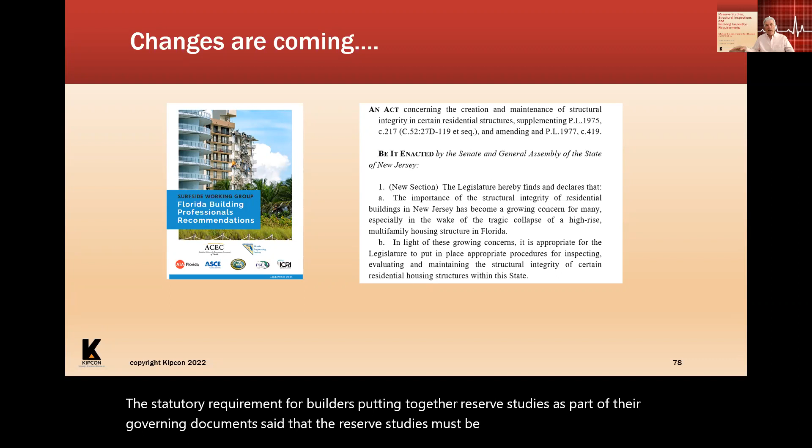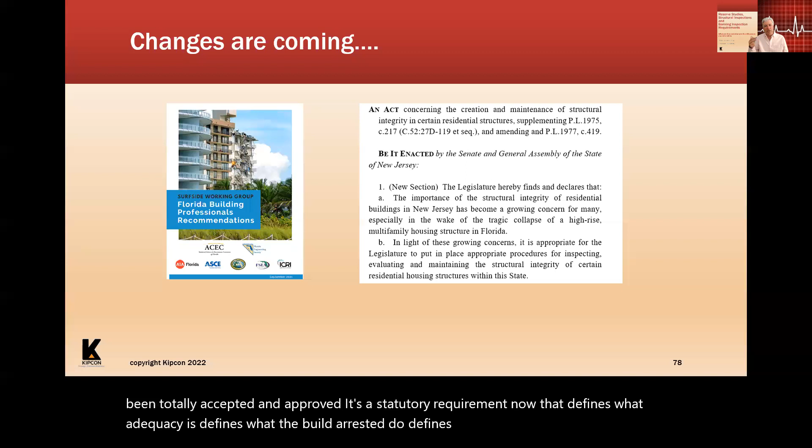So what I talked about, you're probably going to see coming in New Jersey, but changes are coming. The other thing included in this is the requirement for associations to do ongoing reserve studies, as well as preventive maintenance. Until a couple years ago, the statutory requirement for builders putting together reserve studies just said they must be adequate. Now there's a statutory requirement defining what adequacy is, what the builder has to do, updating the reserve study, completion of construction, everything having to do with reserve studies for developers. And now what's coming is reserve studies for communities. So it's on its way.

This is not legislative, but I think it's a good best practice, and we all ought to start doing it. Managers on this call are often involved in establishing budgets for new communities, as are lawyers. When you do a new community budget, you've got a working capital fund because the GSEs require an initial working capital contribution at the founding of the association. We should put into that working capital budget the money necessary to do that first reserve study and baseline structural inspection. That way it'll be on the radar of the manager who takes over, and the board will know they have the funds to get that reserve study and baseline structural inspection accomplished.

Thanks, Bob. Cliff, did you have anything you want to add? No, I thought Bob did a good job.